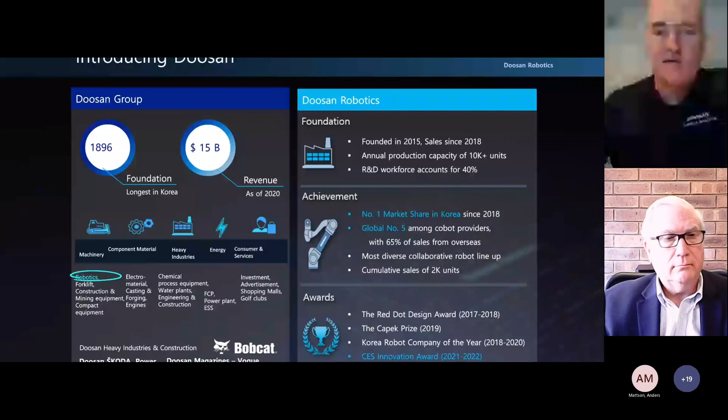One thing I'll mention too when looking at the robots is the naming convention. For example, if we look at the H2017, you have the H which is the series of robots, the next number is say 20, which is your 20 kilogram payload, and the last digits are for your reach - so 17 means you basically have 1700 millimeters of reach. So it's a nice way when you're looking at the robots to get a feel for what you're getting into when choosing a robot. Kind of a good little cheat sheet on the naming convention there.

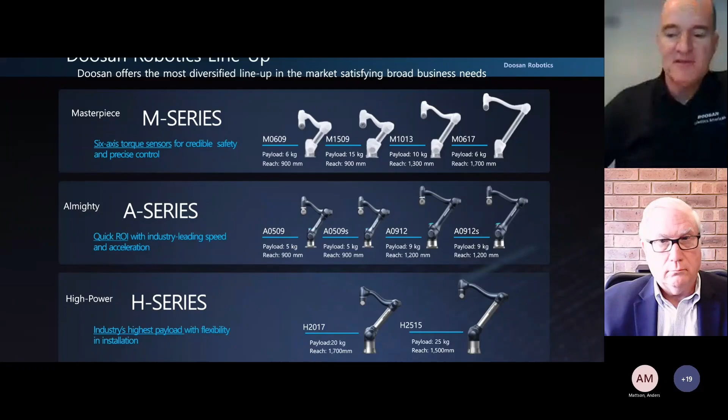Here you'll see the lineup when it comes to reach and different payloads. One of the applications that ONExia has utilized is the H2017. You'll see that one falls in line with the M series, the M6 basically, same reach but say 6 kilograms. With our H series, H20 is definitely the heavier duty payload.

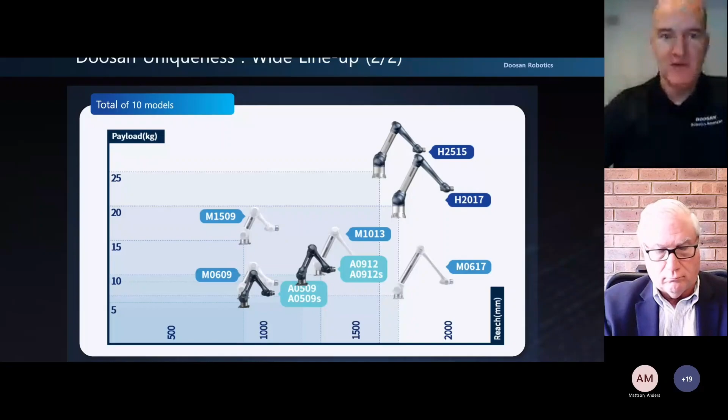The other thing with the H series - this robot has 6 torque sensors. When it comes to the H and the M, they both have the 6 torque sensors, so you're getting full compliance, force control, and high precision with a collaborative robot. It's great feedback as well when working with the robot, especially a collaborative robot, to have the 6 torque sensors.

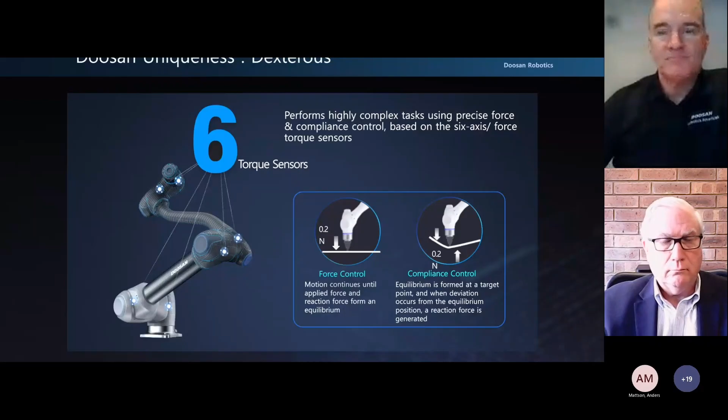This slide here, I really wanted to focus on the fact that you've got a heavy payload robot with its H series. What you're seeing in the slide is that the robot weighs about 165 pounds, so not too heavy.

You can also put it on an AGV or AMR system. Even though it's a heavier payload robot, you can still put it with an AGV. So it's really flexible - a lot of times you'll see smaller collaborative robots on an AGV type of system, but certainly with this robot, you can do that too. We're not going to focus on that today, but you can definitely see the flexibility there.

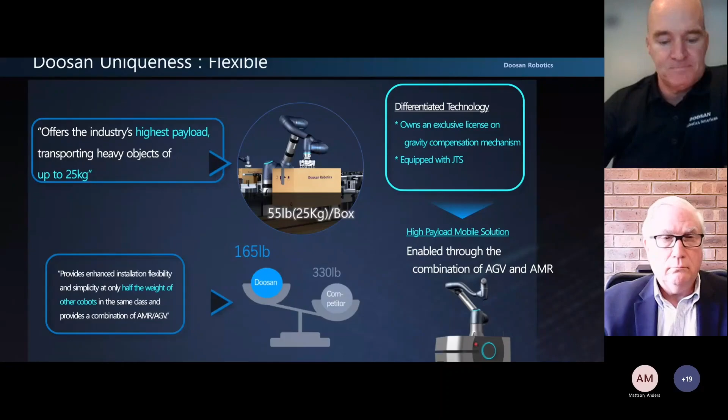Here's just an overview of the reach on the H2017. As we say, it's about 1,700 mils reach, so in this case we show the diameter at 3,400, coming from the center of the robot out to the faceplate. So you're getting a full range of robot use with the H2017. Great robot, great reach, with the heavy payload as well - definitely a good feature to think about when you're looking at the robots.

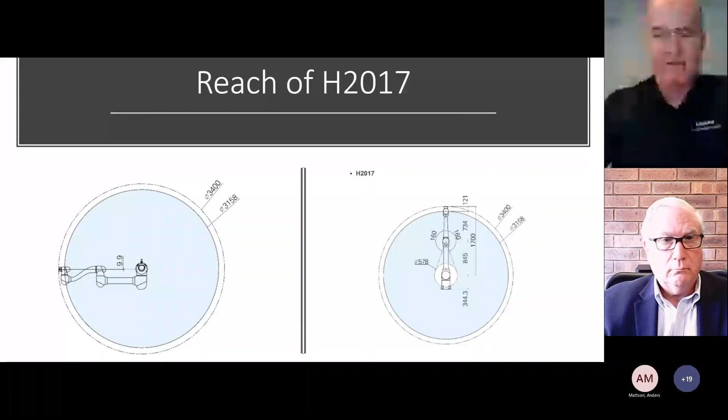In this case, this picture I'm showing you is the ONExia system. Like I mentioned, I went out to ONExia recently and we were talking about doing these webinars. I thought it was really fantastic to see this system - very modular. I like that you've got the pallet jack, so you can easily move this around, and Greg can talk more about that. So, looking at all the robots, Greg, this is what I was going to talk to you about.

With a lot of the robots that are out there in the field, there's quite a few to choose from. So what made you even consider choosing the Doosan? What kind of led you down that path?

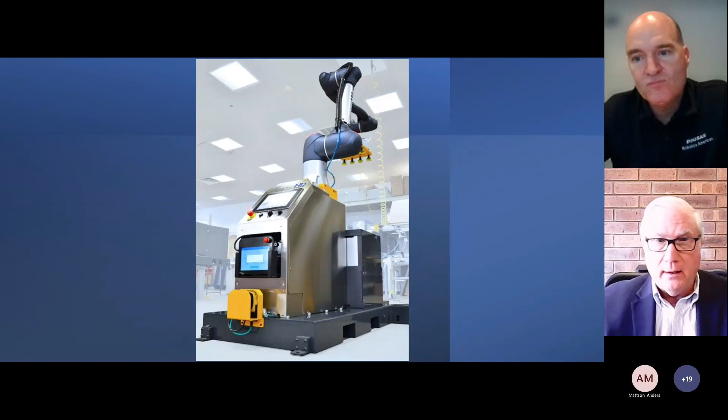Good question. The primary reason was a majority of the inquiries we were getting from customers were for palletizing payloads in the, let's say, 15 to 25 to 35 pound range. And the Doosan H2017 really is the first robot of its kind to be able to handle those kinds of loads - that was the initial driving factor. After we gained some experience with the robot, its robustness, its ease of use, the weight of it, all those things combined to make it very desirable.

Yeah, I was surprised when I first started working with these robots at the kind of speed and acceleration you can get with this robot. So really the payload was your first driving factor, right? Just getting into the Doosan robot.

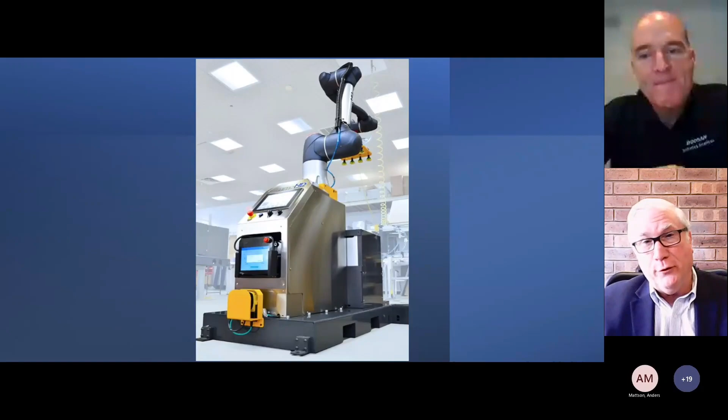And actually I want to say that you guys were the first company that I'm aware of that received the H series robots - I don't know if you guys knew that. I don't think we knew it at the time, that we were pioneering, and sometimes pioneering is not the best experience, but the experience with this robot's been good from day one. That's great - if we were the first, that's something to be proud of, I think, and it worked out very well.

Well, that's good to hear. I know there's definitely a lot of good success stories with it. And like I say, even with Doosan being kind of a newer name, you could say, I'm sure it was maybe a little gun shy to say, okay, who are these guys, what am I getting into? But probably give them a try, right, see how it worked out.

Right, we have good support from our local distributor, RG Group, and that helped with our confidence early on, and has worked out nicely. That's great, yeah, that's good to hear. We do have different partners, and it's great to hear that you have that good relationship with those guys. That is something we're working on here - we're kind of building the team here in the U.S. We have an office in Texas, not quite complete yet, but we're basically building up this team here in the U.S. to give further support, and also support the RG Group and those to help you guys even more.

So one of the things - how long have you been utilizing the Doosan? How long ago was that? I kind of lose track of time, but I think basically last year, 2021, is when we shipped our first what we call Palletize HD, which is the unit with the Doosan robot. So it was sometime, I think, mid last year, roughly.

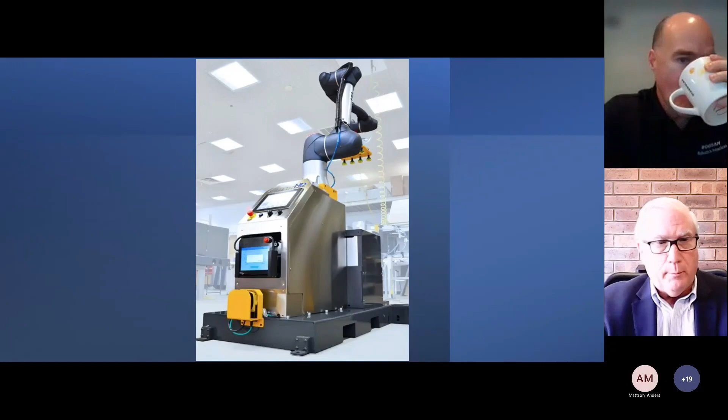We do. The Palletized HD is very much a standard product now. We've made it extremely universal so that in our software, you're able to go in very simply and put in what size box you're going to palletize, what size your pallets are. You can drag and drop for the pallet configuration, arrange where you want labels shown, all of the normal requirements for putting boxes on a pallet. All of that's contained in our software and makes it very universal. There's no programming - the customer never has to do any sort of programming.

And so, yes, we have a lifter so that we can reach or build higher pallets, depending on the box size, over 100 inches high. So it's very versatile, but also very standardized.

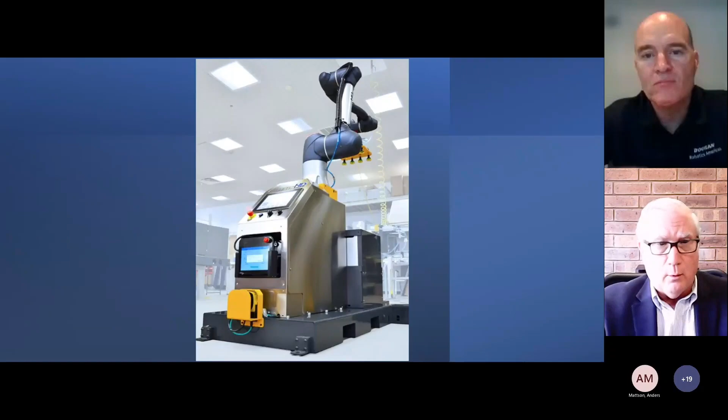The only thing that really becomes custom on it is the end effector - the part picking up the box. Those are designed or developed for the particular size of box or boxes. We can also do multiple picks, picking up 2 or 3 boxes at a time, which increases our rate or throughput. So that becomes customized, but otherwise the rest of it's standard.

So, matter of fact, I've got a video here I'm going to show that you guys shared. So maybe you can talk about what we're seeing here.

So I know it is a Cobots and Coffee, so don't get the wrong idea. We're not jumping into the 5 o'clock hour yet when you see this.

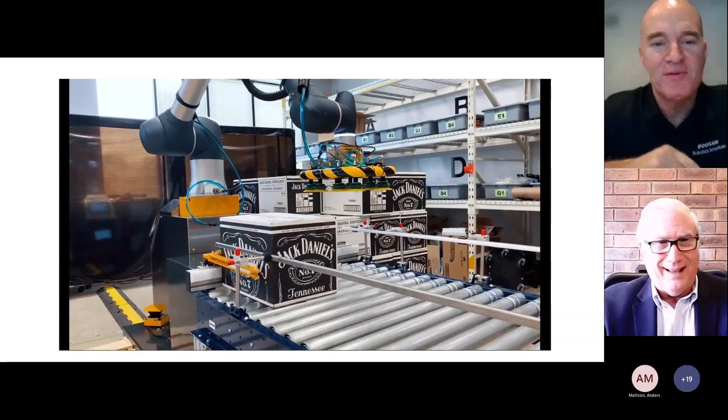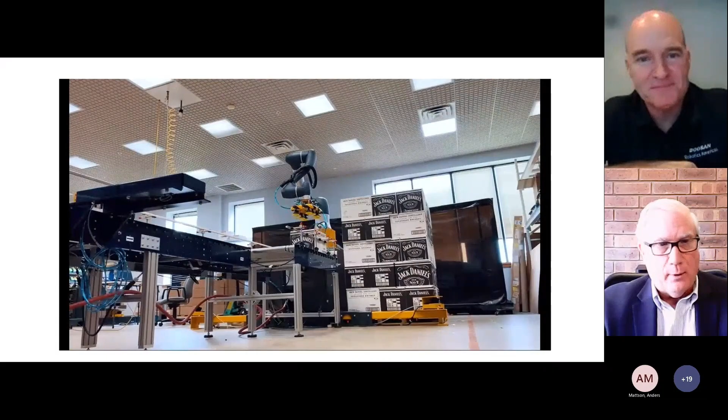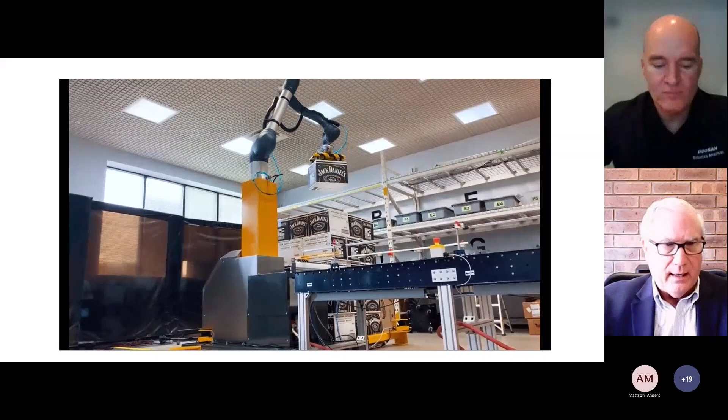But yeah, that's obviously a heavy box you're dealing with there. Right, right. In fact, this is an example of where a customer asked us to do a complete line. So it starts with taking the boxes at the beginning of their line, closing the tops and taping them, running them through the conveyor, and then picking them and putting them on the pallet. So we're able to provide the entire solution for the customer.

Okay, so you guys are doing all your integration at your shop, and then you'll send off the final product to the customer. Right, yeah.

Do you have any applications where you've, say, built right on site as well?

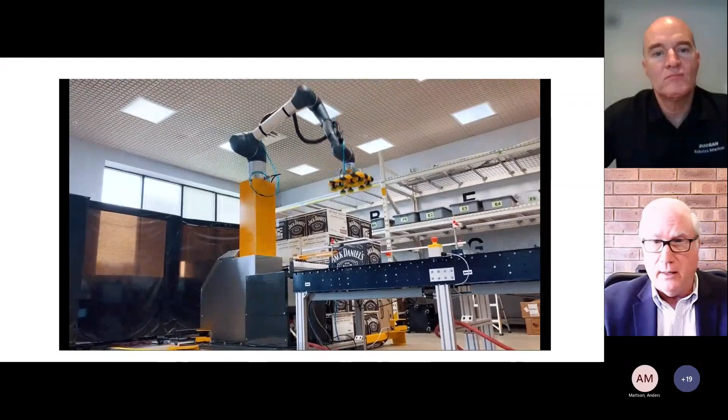Well, we first do things in our own shop. So most of the palletizers are going out with some sort of conveyors feeding the boxes to them. We also do some nesting of those boxes so that we're picking up from a known point. So all of that is done in our shop, and we run factory acceptance here. So both we and the customer know that it's set up properly and it's going to work well, and that makes installation at the final customer site go very quickly.

It's not unusual, once everything's set up, to be operating within an hour. Wow - it's very standardized and very simple to work with. Yeah, nice, it did seem like a nice ease-of-use application.

So I know here is where you are doing a double pick application. Yep, so right, custom end effector to support that. That's correct.

Yeah, so we'll just let this finish up there.

One of the things I like to consider when dealing with these types of applications - it's a 20 kilogram payload - but I always like to say you definitely want to look at the payload on your robot. You might be at max payload, say for example, in this case, looking at the chart, I could be offset about 100 mils in the Z with my payload, and maybe about 125 in either X or Y when coming out of your robot. So definitely something to keep in mind.

You're doing your center of gravity studies when you're defining your end effector to really take advantage of the robot's speed and acceleration. Always keep your payload in mind - that's something you really want to consider. I'm sure you guys have done that. I always like to remind people to keep that in mind, because many people think, yeah, I've got a full payload, I can carry max payload, but if my center of gravity is 300 mils offset, it's not going to do you a very good job.

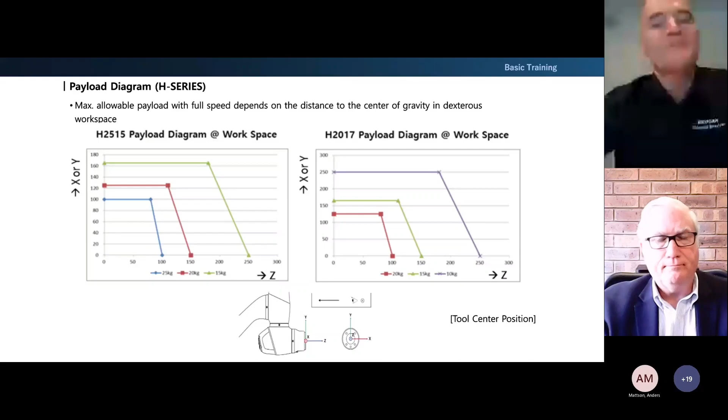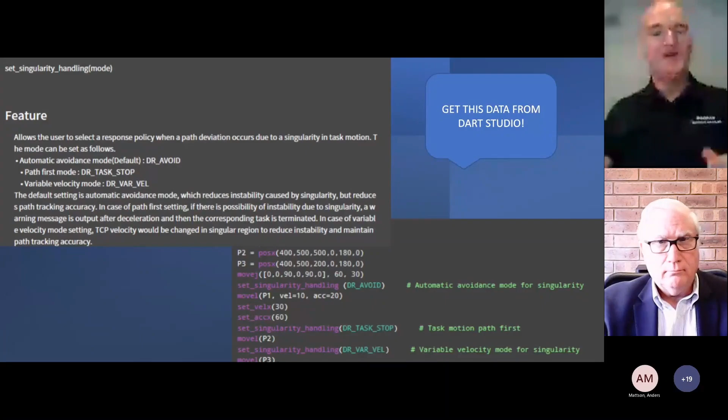So one of the things I want to mention is getting into managing your robot. We have a feature, singularity avoidance, which is set up by default. This is kind of interesting. I pulled this slide right from Dart Studio, and I'll show more Dart Studio later. It's a great software to utilize. Doosan offers Dart Studio as an offline programming tool.

One of the things I want to mention is that within singularity avoidance, by default, it's what we call DR avoid. So when you have singularity avoidance turned on, by default it'll avoid, which will reduce your singularity. However, it'll reduce your path accuracy. So that's the DR avoid - it's going to eliminate the singularity, but it's going to reduce your path accuracy, so you might drift a little bit.

But there's another variable, the DR variable velocity. What that'll do is reduce your TCP speed, but it will maintain your path accuracy. That gives you a little background about how our singularity avoidance works. You can see some sample code - you're inserting this instruction to say either DR avoid, or you could do a task stop. If it did see a singularity in this case, it would actually stop and post a 0 or a 1 that you can track with some different utilities.

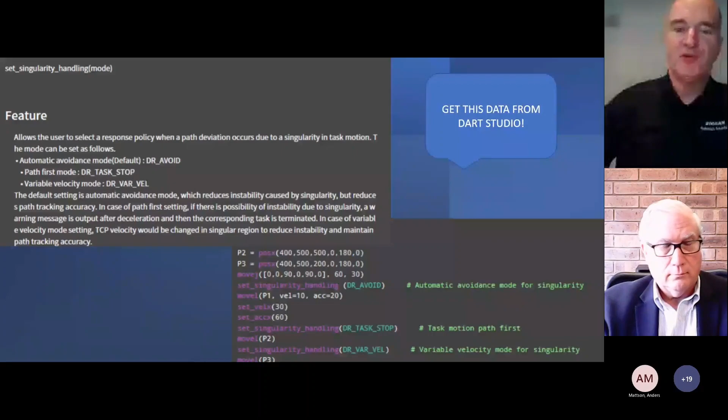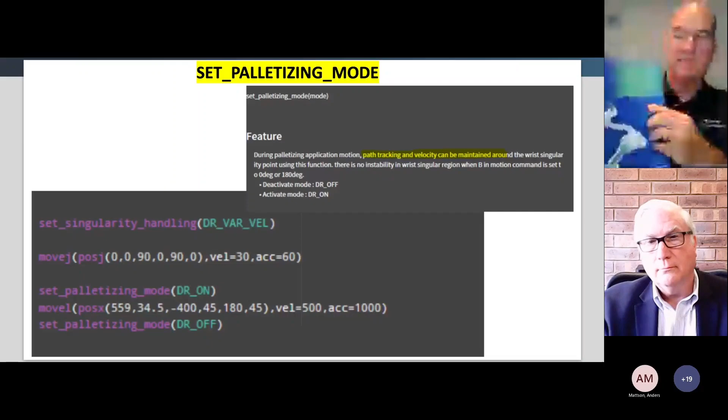So I definitely wanted to point that out to say anybody is kind of utilizing this. And also think about taking advantage of the software, pull that up from Dart Studio. Within Dart Studio, there's a question mark in the center of the programming, and it'll open up like a manual, so it's a good feature to key in an application. When you ship the robot, everybody gets the manual, and people never look at it. But when you go through here, they've really documented all these instructions. So maybe you don't want to look at the manual, but you do have an online manual with Dart Studio. Keep that in mind as you're building out your programs as well.

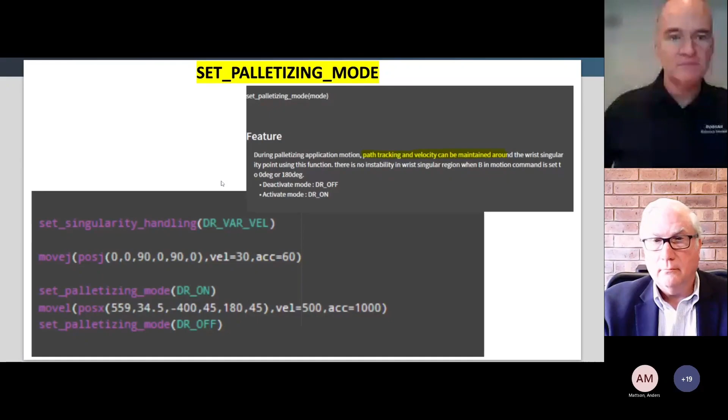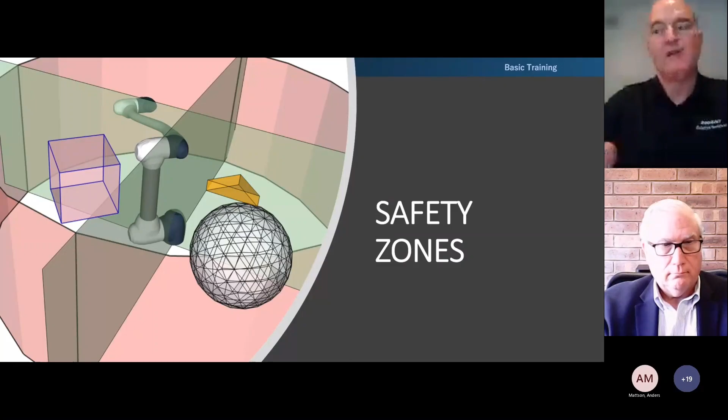So, collaborative robots. We want to talk about some safety zones that we offer. Within our robot, we have built-in safety zones, all part of the software limit. One thing most people would do is set what you call a space limit, setting a boundary of your robot. Maybe the robot could reach 1700 millimeters, but your work zone is only, say, 1200, so you can work within a smaller space zone with your space limit.

You have these other features, say, crushing prevention zone. I like to think of that as like a column. If I did hit that accidentally, it would stop the robot. It can be a zone that you define, so it won't slam into the column. It'll actually stop before it really does.

Then you have these other features, say, sensitivity zone, where you can adjust your collision sensitivity. That's a feature within our robot where you can be very sensitive, where a very small amount of force will stop that robot, or you could have it at a higher value to manage the heavier payloads. You can always adjust that in your programming and set up these zones.

Another feature is tool orientation limit zone, so you can control, maybe joint 5 downward. So if you have an operator near that work zone, the end effector doesn't go into his face. You can control your zones like that.

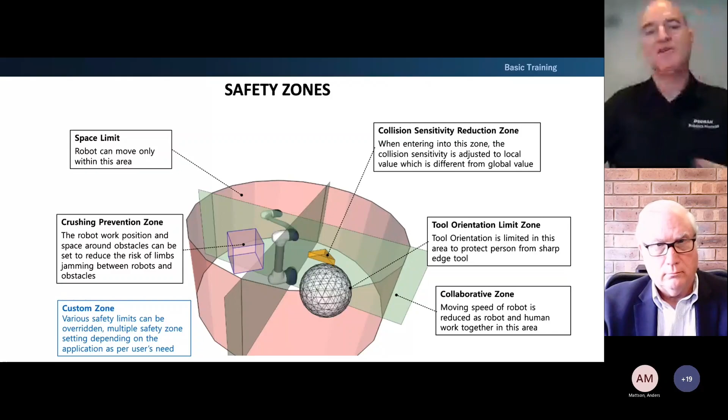I'm sure you guys have safety zones or different safe protections, but I will tell people that you should always conduct a risk assessment on your projects.

So this slide here, you are working with people. We take a lot of pride in saying the robot is Cat 4 certified, which is your highest safety rating. I think that's great to be aware of with this robot.

When I was out at your facility, the customer wanted to test the feedback, and he was actually really surprised. He basically hardly touched it, and the robot stopped.

So definitely the safety has been a big issue with our customers overall, and those safety capabilities have been really important. We use the fence. For instance, our palletizer palletizes to one side on a pallet. When that pallet is complete, we continue building the pallet on the other side. That first pallet's going to be removed generally by a human with either a forklift or some other means. So we have a fence to protect that area. The robot's not going to go in there while that's being removed. We take good advantage of those.

Safety assessments - we've had multiple safety assessments done on the system, both in our shop and at the customer sites. We've always passed, and that's a really important thing, much of that due to the safety built into this robot.

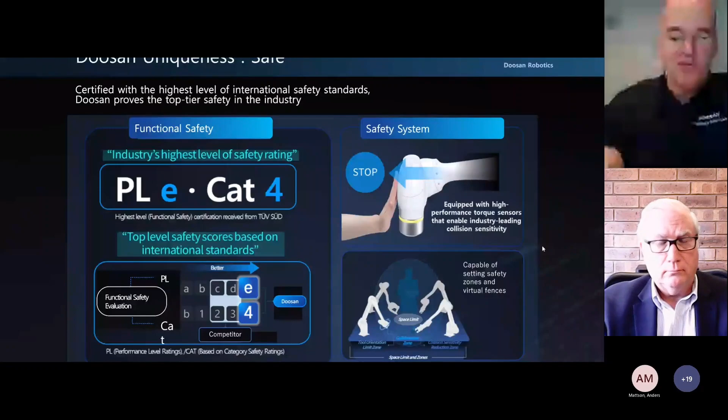So the next thing we'll get into is a little bit of hardware. Just to recap on the safety - we have built-in safety zones, and it's a very safe robot, but you always want to do a risk assessment when you're doing your system.

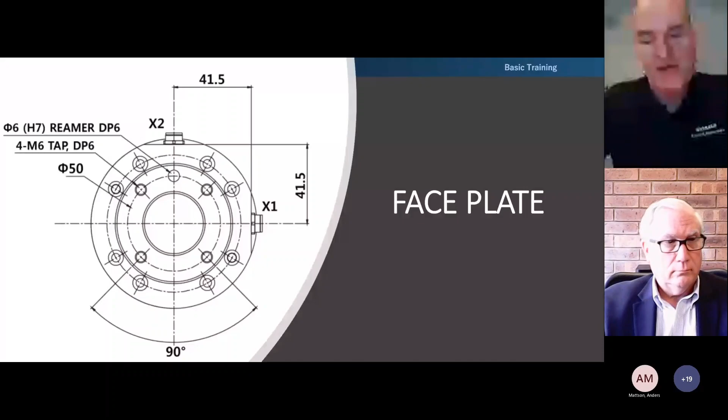Taking a look at the faceplate, one thing that's great about the H series is we offer 6 inputs, 6 outputs on the robot. In the future we'll also offer RS-485 - you'll see that a lot more on different grippers that utilize RS-485. Currently the A series on this slide does have RS-485, but we'll be supporting that on the M and H series soon.

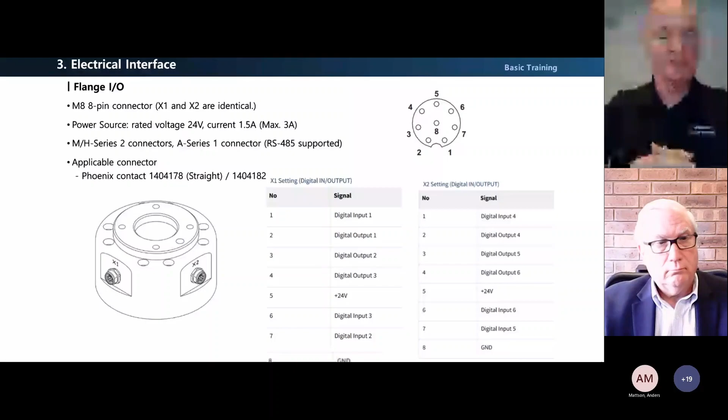So I know with your application, what do you guys use for I/O? Do you have a certain choice, or does it depend on the customer?

We're set up to run Modbus and Ethernet IP, those two in particular, as well as discrete I/O. So if we're communicating with peripheral devices, customers, PLCs, things like that, could be Modbus or Ethernet IP. Okay, so you take advantage of them all. Yeah, yeah, the robot is equipped for that.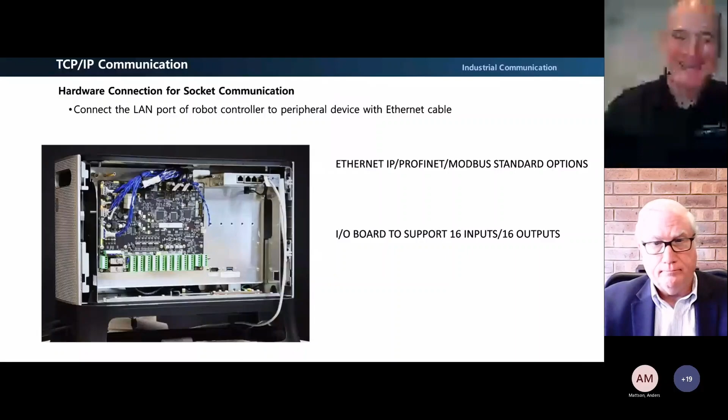Yeah, it's managed from the custom application. We utilize individual vacuum generators for each of those cups so that we get really good hold. Cardboard boxes vary dramatically - they are porous, some more porous than others. So it's important that we get a good grip, and this technology has worked really well for us.

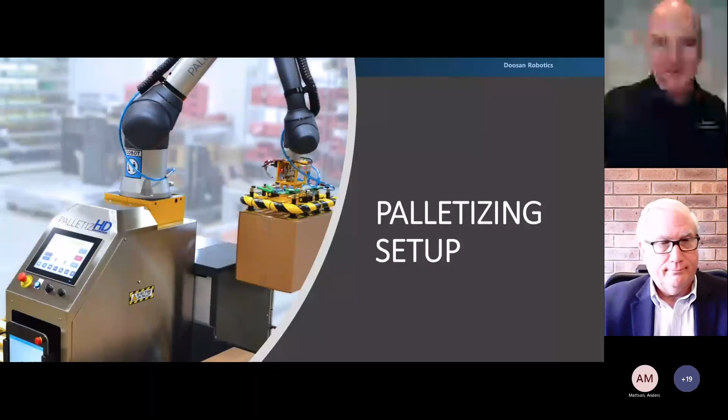So I know time is flying by, but I do want to get into our palletizing discussion. I'll mention that on the Doosan controller, we do have the ability to palletize on the robot. So this is a screen from the controller. If you guys are using our robots, you could set up the robot this way.

You would then go into the peripheral equipment, and you'll see that here, and then you can define a pallet. The way it's set up, you're kind of defining an array at one level, so you'd have to build your own pallet, if you will. But that is an option that Doosan does offer on the controller.

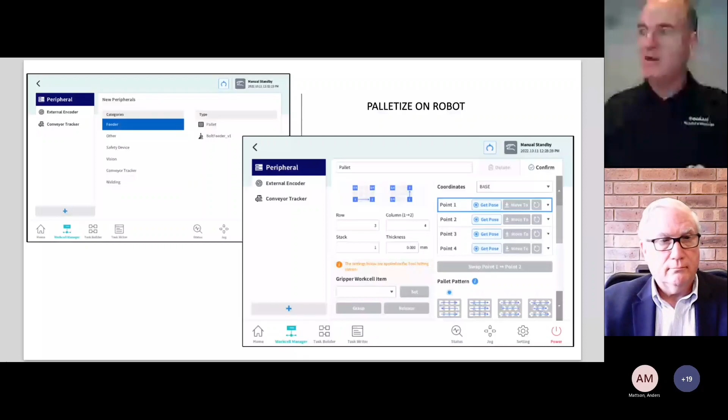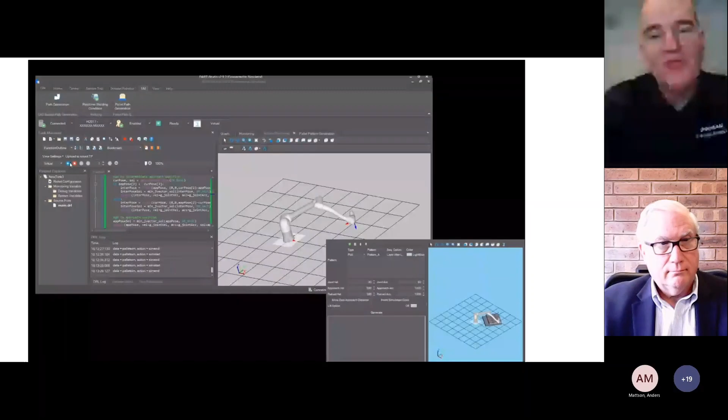Another option is with Dart Studio. These are features we can definitely get into in a further webinar, but just to give you an idea, you can build a palletize routine within Dart Studio, which is our offline programming simulation software. You'll see the robot moving through its course, and on the left, the yellow highlighting shows it going through the code.

The beauty of this is you build it. In the lower right-hand corner, you're building your pallet within this pallet utility, and you can define your boxes and really generate a program from this. Once you build it out and have your pallet laid out, you can do a generate, and it'll generate the code, which you can copy into your robot. You'd then just have to insert your instructions to pick from your conveyor. That gives you an idea of what you can do with Dart Studio.

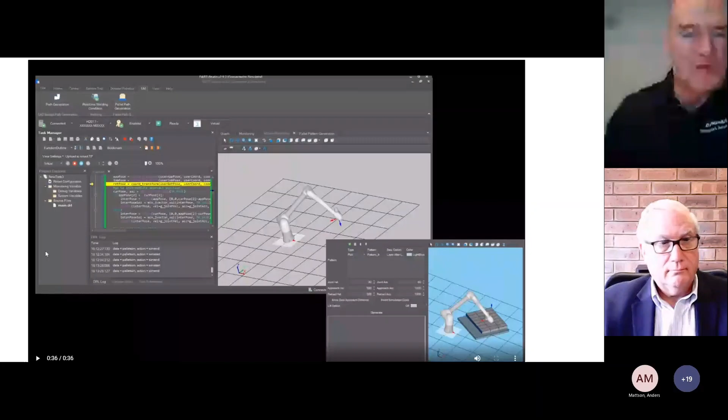And I'll just mention there's that question mark icon. For those of you using Dart Studio, take advantage of that - it's your built-in manual, so definitely use it.

With ONExia, one of the things that's kind of unique is you guys have built your own custom application for palletizing, which I think is really unique with what you're doing. I've got a video here, and maybe you can walk us through it. You'll see this is your module, that's your interface, and there's the teach pendant that's accessible.

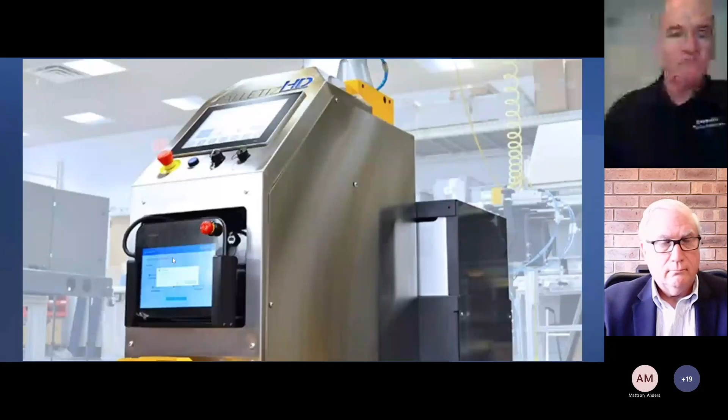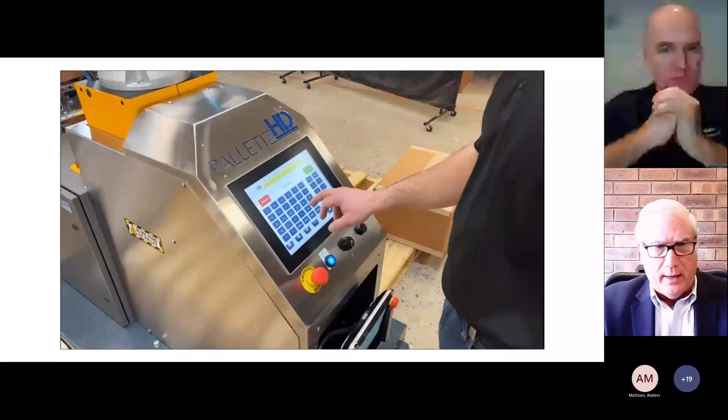This is actually going to go through setting up the software. Greg, if you just want to fill us in on what you guys are doing for palletizing. Sure. So the key to our software is we try to make it so that it covers as many different box sizes and pallet configurations as possible. We made it very universal such that the customer doesn't do any programming.

There's multiple password protections to get into the software, depending on who's doing it. Everything is on the touchscreen, as you can see there. And by the way, these videos are all available on our website as well.

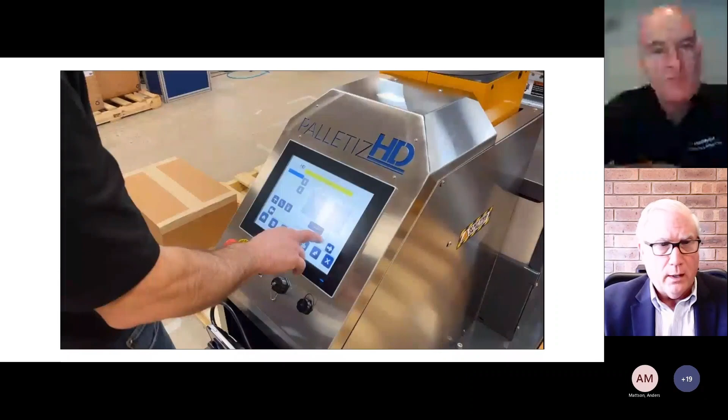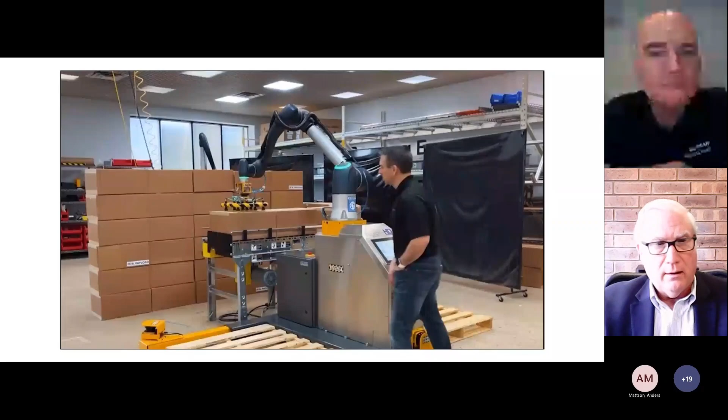So they're setting up an individual box size - I just fill in the blanks. It's kind of hard to see from this video, but on the screen we bring up the boxes, and with your finger you can just move them over to the pallet, indicate which way you want the label facing when it's on there, and build up each layer. You can copy layers, mirror layers, and then save it as a recipe, and call it up anytime in the future to run that same pallet again.

So with your software, when you ship out to a customer with their boxes, can they easily add new recipes, or do you have to go on site? How does that work? No, we usually do some initial training, and we can do that on site if they ask us to come for a startup, and we'll train their people. We can also do online training.

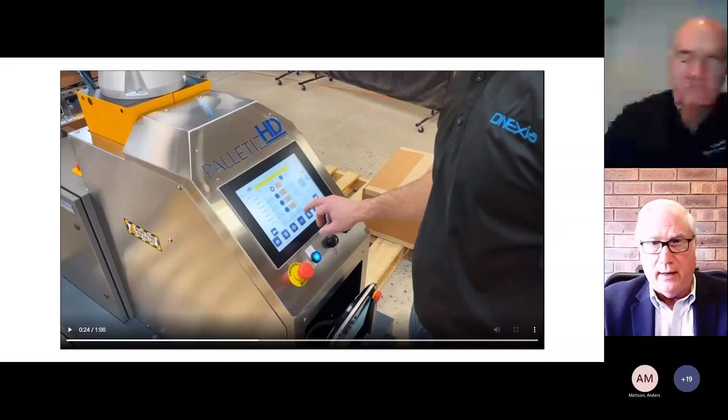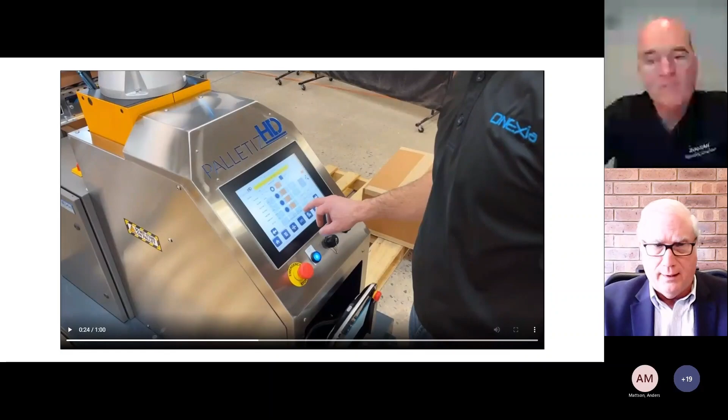But the whole idea was to make this intuitive, and generally any operator on the floor can go over there and set up a new pallet just by entering that information. We've tried to make it as simple as possible, and literally you can go from one palletizing setup to your next one in, I'd say, 10 minutes at the most. It's very straightforward. That's great to hear - in today's world, you definitely want ease of use. That's the name of the game.

One of the things we're trying to do with our robot is, you mount a gripper, you can do plug and play, so you don't have to configure it. It sounds like you guys are doing that on your side. Yes, which is fantastic. Once you've defined your parameters of that work cell, your safe zones and whatever defined, now they can just add in a new recipe. So it definitely makes life easy for the end users.

I know we're just wrapping up here and went a little over time. A couple things I wanted to ask you, so obviously you've had 40 plus robots out in the field, which is great, that's awesome to hear. Do you know if you have any customers running 24/7 operations?

Sure, it varies a lot, but I'd say most are running something more than one shift. There are a lot of companies out there running 12-hour shifts, so they may only have one, but it's a 12-hour shift. And then we have others running more traditional 2 and 3 shifts. So some are definitely 24/7.

That's the beauty of the palletizer. Part of our sales approach is to say you can depend on it. It's handling heavy boxes, there are no ergonomic issues, it never goes home, it never calls in sick, it's just always there ready to work. And they absolutely work 24/7 and without problems.